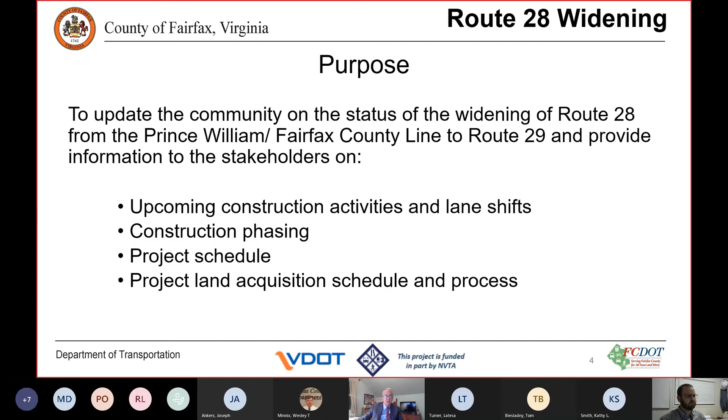Our agenda is first to look at the project and schedule overview, to discuss current construction activities and anticipated activities in the next 6 months, to talk about the land acquisition process, and finally to answer any comments or questions that you all may have.

The Route 28 widening project has a total budget of $78.8 million. This includes right-of-way, construction, inspection, and administration. The project will construct an additional through lane in each direction to provide 3 lanes in each direction from just north of the bridge over Bull Run, north to the Route 29 interchange.

We'll also reconstruct substandard crest vertical alignments on southbound Route 28 to meet current design standards and provide greater driver visibility. This will occur on southbound Route 28 between Compton Road and Bradenton Drive, and also on southbound 28 just south of New Braddock Road.

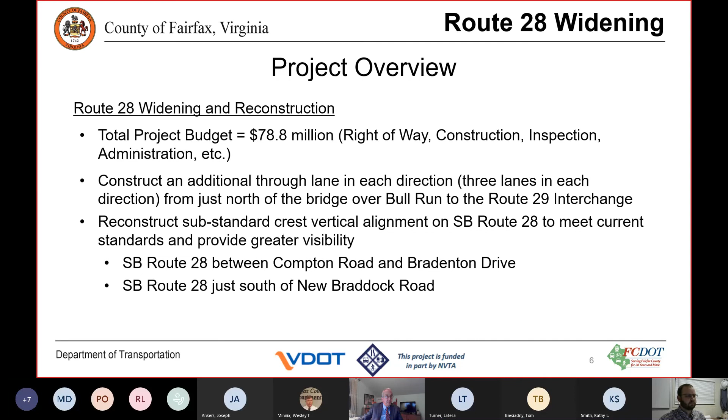We'll also include shared use paths on both sides of Route 28, all the way from just north of the bridge to Route 29. There's a short section of sidewalk in lieu of a shared use path on the southbound side of 28 between Upperridge Drive and Machen Road, due to right-of-way constraints.

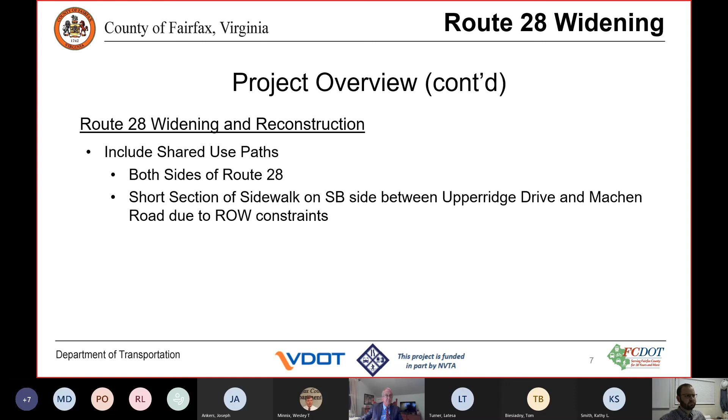If you've been on any previous meetings, you've seen this drawing. This is an overview of the project. We're widening all the way from the Bull Run Bridge, the Prince William Fairfax County line here. The northbound transition from 2 lanes to 3 lanes will begin just north of the Bull Run Bridge, and will widen from 2 lanes to 3 lanes from here all the way north to just north of Upperridge Drive, just south of the Route 29 interchange.

On the southbound side, there are existing 3 lanes southbound from Route 29 down to New Braddock, and we'll leave that in place. Then we'll be widening from there all the way south to just north of the Bull Run Bridge, from 2 lanes to 3 lanes. The transition from 3 to 2 lanes will be provided just north of the Bull Run Bridge.

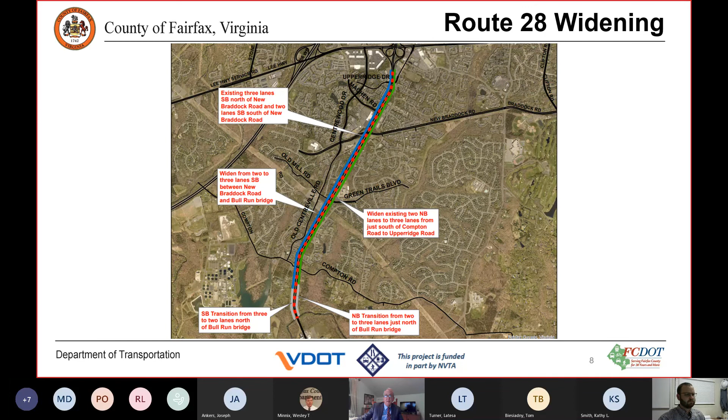At this time, I'm going to turn this over to Tripper Henson with Shirley, who's going to continue the presentation and talk about the ongoing design and construction.

Tripper, thank you. Thanks, Jim. As Jim alluded to, I'm Tripper Henson, Shirley Contracting Design Build Project Manager. Some of you folks maybe have attended previous meetings. Some of this will be a little bit repetitive, but I wanted to give a quick update of where we are, what you guys are seeing on the project, and a few things moving forward.

The project, as Jim just explained, starts at the Prince William Fairfax County line. The job from a sequencing standpoint is really broken into 2 major areas. We refer to Area 1 as the southern limits, up to the Green Trails Old Mill intersection.

In these graphics, the northbound lanes would be the right-hand side of the screen, and southbound lanes on the left-hand side. The intention of these graphics is really just to explain and give some representation to what we are currently building. We are currently in stage 1B, and the bulk of the work that everyone has seen to date is, in fact, in Area 1, primarily south and north of the Compton Road intersection.

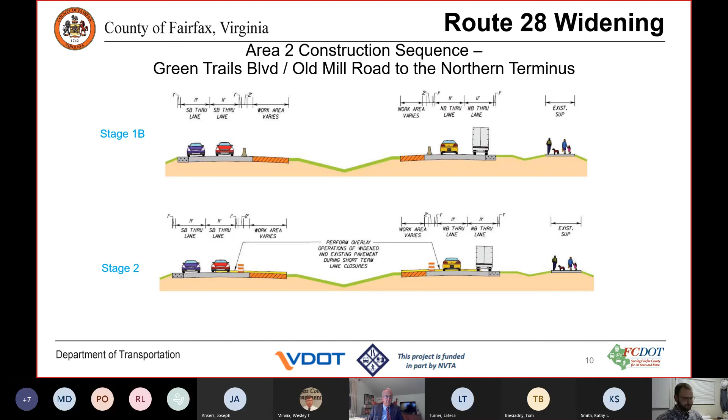A little bit about where we've been and where we're headed from a big picture standpoint. The red areas are completed activities, or status portions of the project.

Well before Shirley was awarded the project, there was of course the Fairfax County design public hearing and NEPA document process, which happened back in 2019. We were awarded the contract in spring of 2020, and since then have been primarily working through design and permitting.

The advanced temporary shoulder work, early spring, late winter, we did some temporary shoulder strengthening to give traffic enough room to shift and set barrier to allow the work zone to be opened up to construction crews. That work is completed, barriers are set, and we've done some preliminary mill and overlay, putting down a fresh 2-inch lift of asphalt, which is what everybody's riding on today.

We recently, earlier this month, received 100% plan approval, which allows us to continue working in other areas and keep the project moving as a design-build project, where both the design and construction are in our scope. We're constantly trying to get to the finish line sooner, working where we can while design is finalized, getting work completed prior to 100% plan approval.

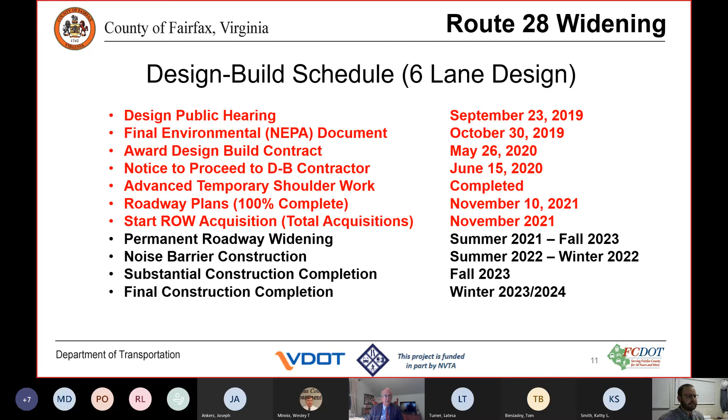Upcoming activities - I've touched on some of these, but a little look ahead. We will continue with storm drainage installation primarily along Route 28. We do have a significant amount of storm drainage on the side streets, but the bulk of the project will be primarily concentrated along the 28 corridor.

Excavation and roadway widening, as I alluded to, will continue throughout. Very shortly upcoming, you will see additional temporary barrier placement from Green Trails to Upperridge. That will be in the median to open up those work areas and safely allow both for the traveling public and construction vehicles access into the median.

Upcoming, we are placing roadway aggregate and pavement section as we speak for the Route 28 northbound to Compton Road East new turn lane and ramp. That work will open up that ramp as an early traffic shift. People won't move very far, but that will open up some permanent signal construction, which is located in today's ramp. So we've got to do a traffic shift over there to open up that work.

That will roll into other permanent signal construction for all 5 signalized intersections, as well as, once we get further north, some additional clearing and grubbing. And as those pond parcels I mentioned early on are acquired and opened up, you'll see some pond construction on the 3 above-ground stormwater management facilities.

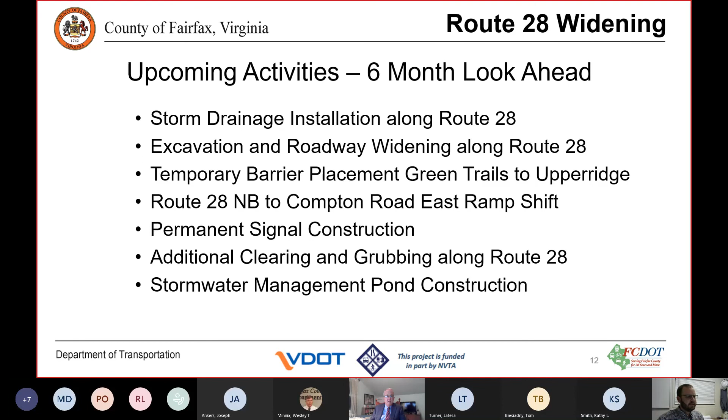I know that's a very quick and dirty look ahead, but that's the new activities we've got coming up. Just a little bit about what to expect during construction - the project has a very tight footprint.

There's a limited amount of work that can be done without lane closures. Primarily on the southern end of the job, we've been doing lane closures, not every day, but significant durations worth of closures. Those are, of course, at off-peak hours, the best that we can. We know commuter traffic is a challenge throughout the corridor, and that's the whole reason we're here, to widen the road. So we've done everything we can to minimize the time we need out in the road, but those are the lane closures and time restrictions we're held to.

There is also night work, which has been ongoing. We're done with the first phase of night work, but we're trying our best to limit the amount of it. Primarily, night work will be used for storm crossings of existing Route 28, as well as asphalt and pavement operations in the existing lanes of 28. The effects of doing that work during the day are just unrealistic for the traveling public, so it really needs to happen at night. But we're doing the best we can to minimize it.

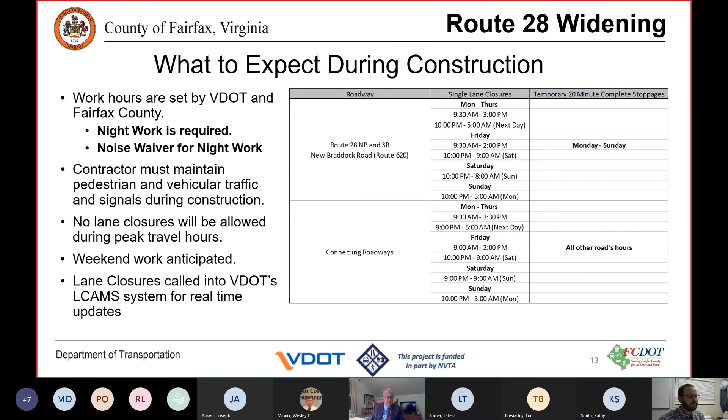Moving into right-of-way, which is another big thing we wanted to talk through at this meeting. I'm not going to walk through this in detail, but there are a number of right-of-way parcels affected by the project, some of which are total takes, meaning the entire parcel or a significant amount of it is part of the acquisition. Those are the advanced parcels I mentioned, already underway as a result of the stormwater management ponds.

There are also adjacent right-of-way acquisitions required, whether small slivers of land for widenings, or easements—whether a construction easement just for us to physically have the room to build the project, the widening, or the sound wall, or a utility easement for facilities to be moved out of their current location, which conflicts with the road construction activities. It's worth noting there's no demolition or removal of residential or commercial buildings as part of the project, which has always been a goal from the beginning of the procurement process.

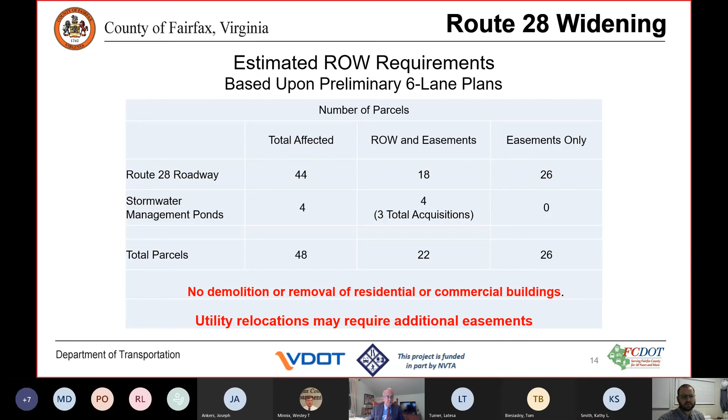I am going to temporarily stop sharing my screen and take everybody to the county website. Hopefully everybody can still see my screen, and now we see the website.

There's a link on the PowerPoint which will be shared, but I wanted to walk everybody through how to get to the right-of-way plans. We had the data sheet originally shown on the PowerPoint, but it's very tough to read. This current right-of-way plans link takes you to the current set of right-of-way drawings. A lot of you may be asking, is my property one of the ones affected by the project?

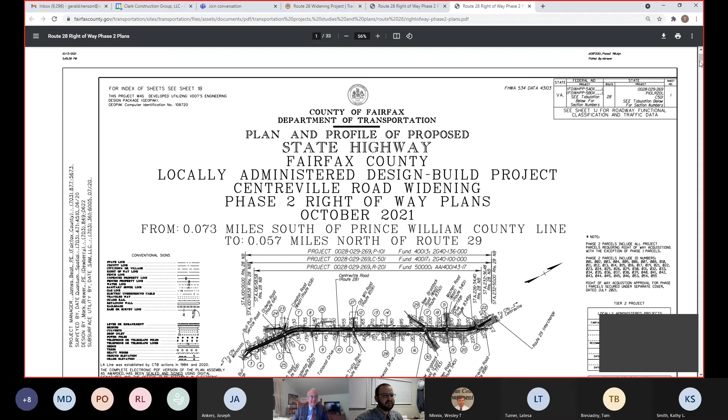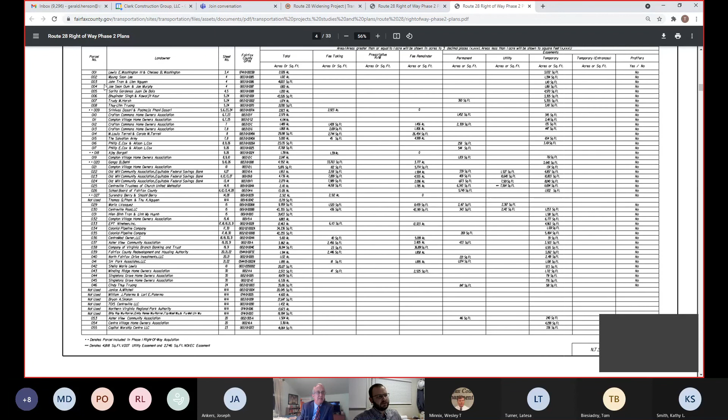I promise it'll load quicker for you guys—I already have it loaded here, just in case. Sheet 1C, if I can get there. It's the third or fourth sheet down: the right-of-way data sheet. This is the summary sheet which identifies all the parcels on the project. Now, just because a parcel is identified on the sheet doesn't mean it is acquired or part of the acquisition plan.

But you can see here parcel, landowner name, and some of them are multiple parcels with the same landowner, such as the HOAs.

This kind of gives a breakdown, and this is the basis of the acquisition and what is needed for the project. Jim, I think you wanted to talk through the information on this sheet a little bit, not to put you on the spot, but if you can blow this up a little bit.

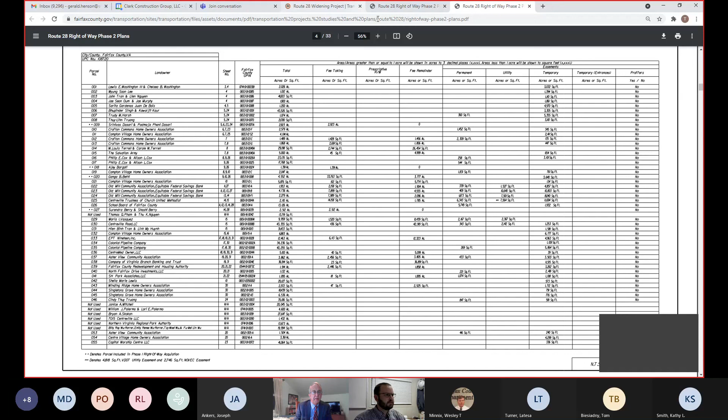There's an echo on. I'm not sure.

You got at the top the parcel number, and we'll show you where that is on the plans in a minute. The landowner, the sheet number, and again, we'll show you that.

The GPIN is the county tax map number that every parcel has. Total area is either acres or square feet of the total area of the property of that parcel.

Fee taking is the right-of-way that the county will be purchasing for the project, and this is land that we will buy and compensate the landowners for.

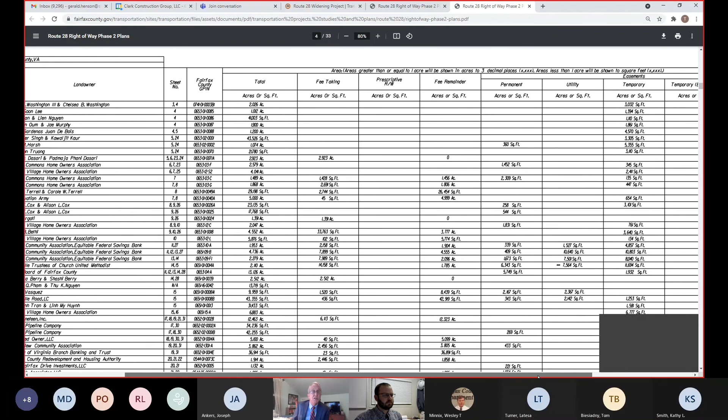Prescriptive right-of-way we're not using. The fee remainder is the amount of land that remains in the parcel once that fee taking has been made. So this is land that the project won't actually buy from the landowners.

The easements are areas that we are acquiring the right to build something on and to install facilities on. This is land that remains the property owner's, but we're putting facilities on it.

Permanent easements are just what it sounds like. These are where we're putting in usually storm sewers, and we have a permanent easement that lets us go in and maintain those. Utility easements are similar.

We'll be putting in utilities, or the utilities will be putting in facilities, and they have the right to come in and maintain that. Temporary easements are areas primarily used that we need to get into the property and do grading or just need area to work. That temporary easement is only in effect while construction is underway, and then the easement is no longer valid after construction is done.

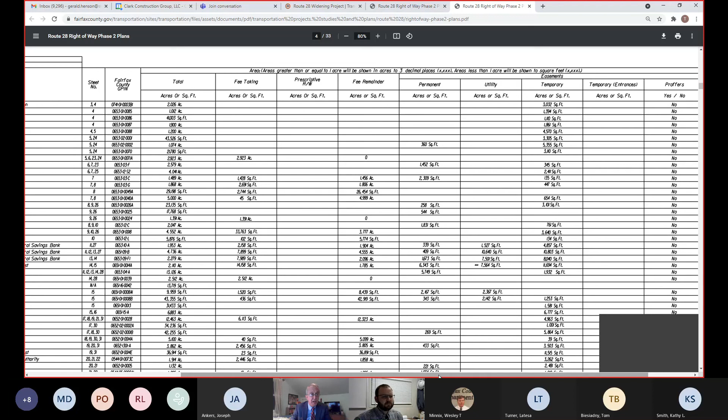Tripper, if you can scroll down to the first plan sheet. And if you look, I'm looking for a parcel number on here. And I don't know if we got it. It may be on the second sheet. Here, there we go.

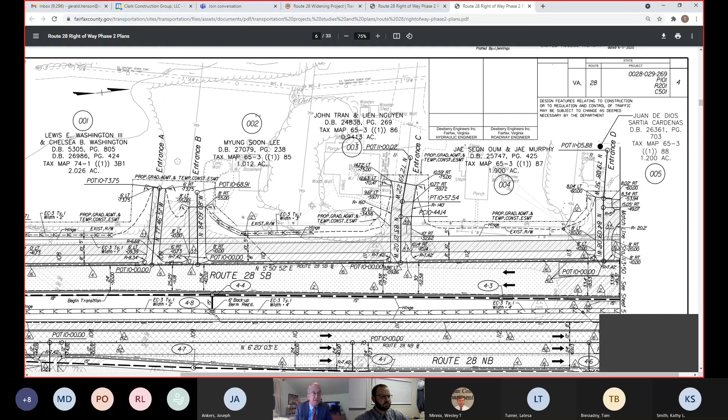You can see the numbers with the circles, 001, 002. Those are the reference numbers for the right-of-way data sheet. The tax map numbers are also there. And then scroll down to the lower right corner, please, Tripper. That's the sheet number, and that's also referenced on the data sheet. So you'll be able to look at these and find your property.

What I'd ask, or what I'd offer tonight, I would be glad to, if you have questions on your property, you can email me or call me. I can send you a copy of the drawing where your property is, and either point out what the easements are needed, or we can call and talk through what's on the plans and what is going to be taken for the project. But I think that'd be probably easier than trying to answer questions on specific right-of-way issues tonight.

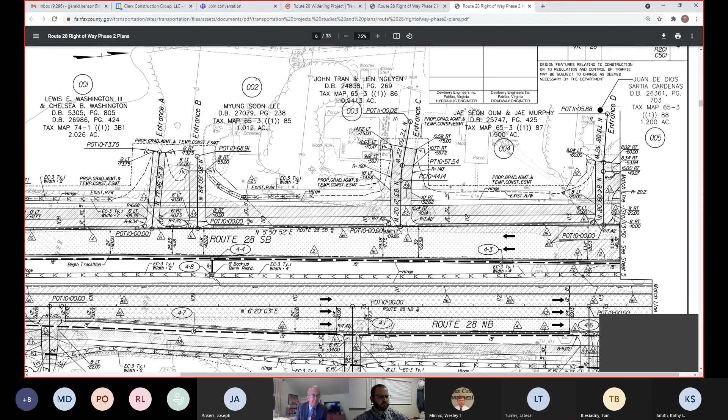Anything else you wanted to highlight, Jim? No, I think that's good. Okay.

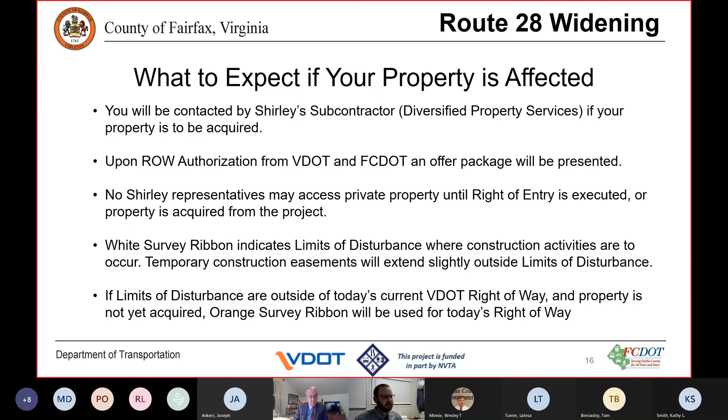So with that being said, I don't know, Jim, if you had anything else you wanted to hit on? I think that's it.